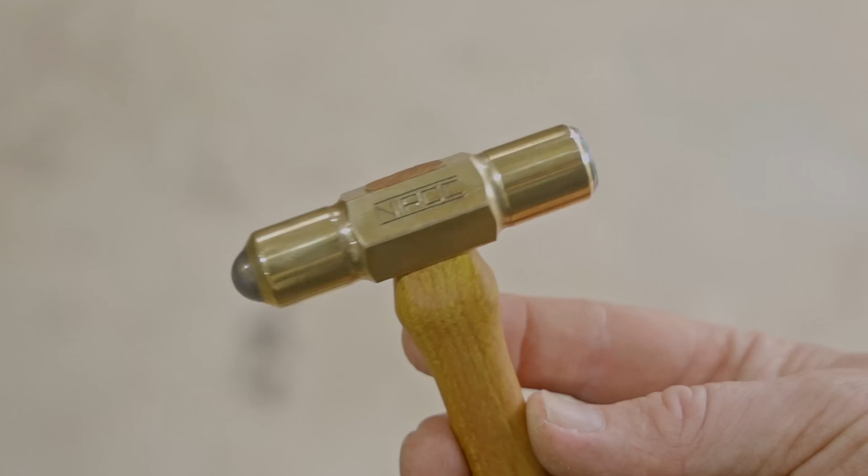A hammer or mallet is a fundamental tool for a maker, and most of us probably have a fair few of them. I don't have a huge collection, but here's a few of them, and they're all used for different tasks.

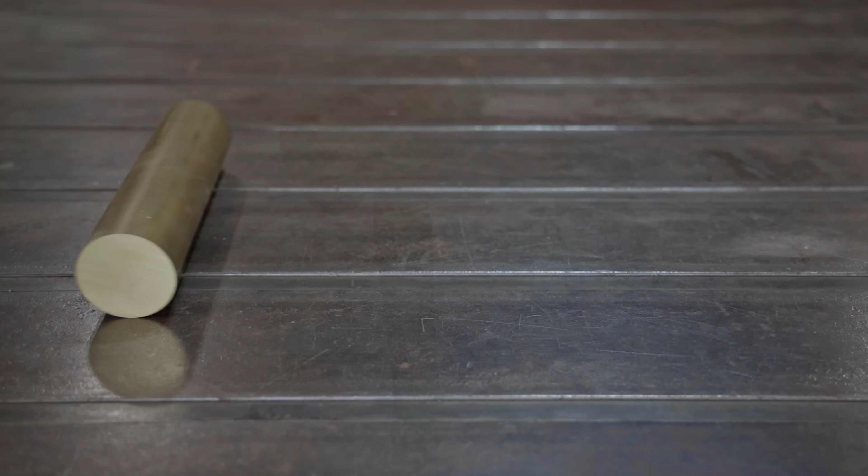One hammer I don't have is a brass hammer, so in this video I'll make one that I designed in Shapr3D. I've got a piece of brass round bar, so I'll cut a piece off that and I'll get straight into it. I'll face both ends first and get it to the correct length.

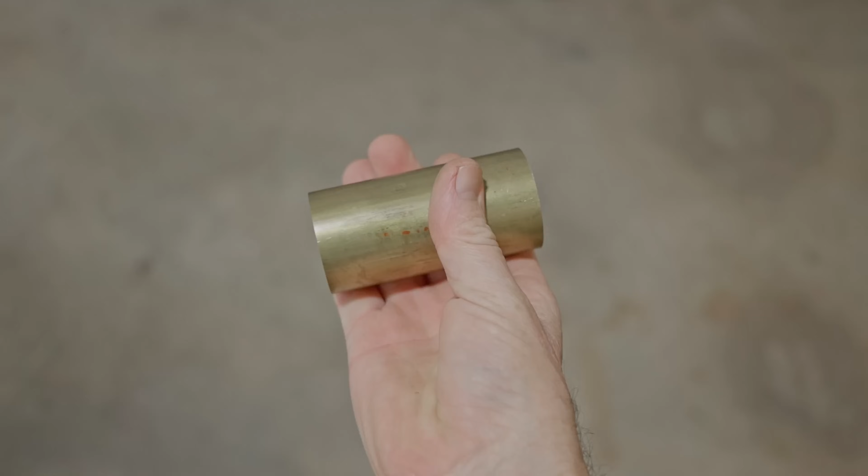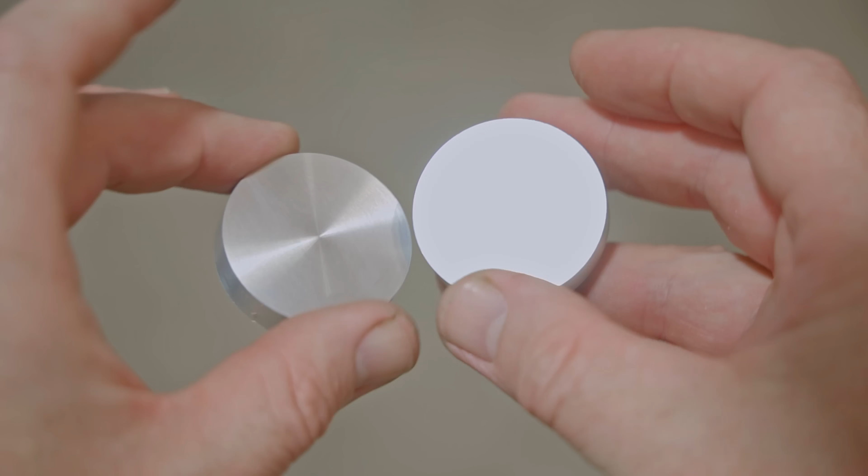I'll be turning the hammerhead between centres, and because I'll need to drill centres to mount it, I'll cut a couple of sacrificial discs that I'll glue onto the faces. I've sanded off the nubbins left from parting them off, but the opposite sides have been turned down flat before they were parted off, and they'll be the sides that will get glued.

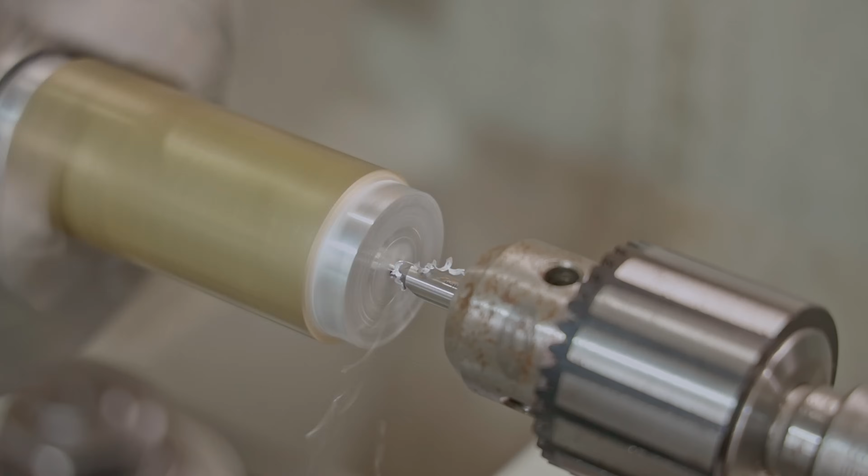I'm pretty confident these should hold on the lathe. The main thing I need to look out for is not getting too much heat into it while turning it. Next, I'll drill the centres ready for mounting it. The disc is slightly off centre, which doesn't matter, but the bar needs to run fairly true, as the brass I have is only slightly larger than the final dimensions of the hammer.

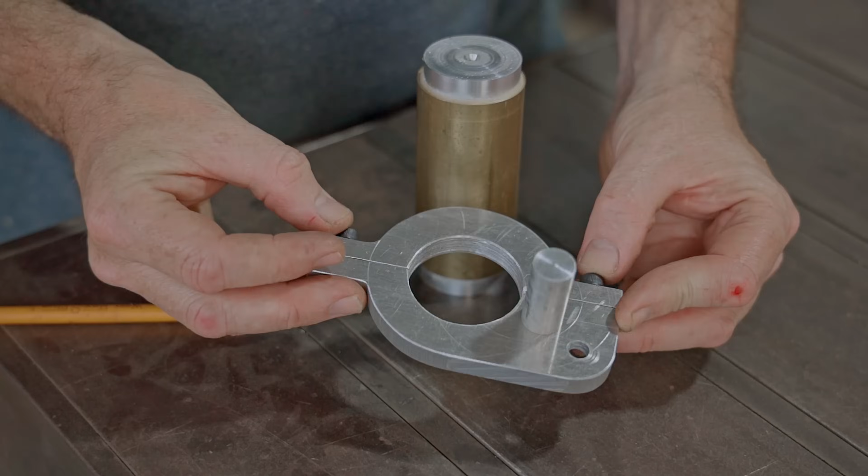To drive the workpiece when mounted between centres, I made this crude drive dog, and the spigot of that will contact one of the jaws of the chuck and rotate the workpiece. The drive dog is only made from aluminium, but I have already used it on this test hammerhead I made a couple of months ago, and it worked well.

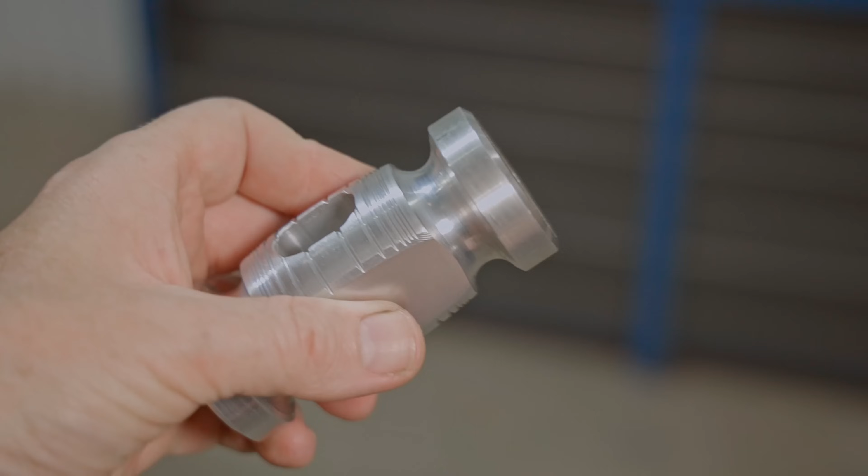I've put a dead centre in the chuck, and I turned that down with a light cut to ensure that it's running true, and now I'm mounting the hammerhead using the live centre in the tailstock. The first thing I'll turn is the fullers either end of the hammer, and I'll try out this carbide cutter and see how that goes.

I'll set the face of the brass as my 0 point, and I'll reference everything from that, and I'm using a cutter with a point in the centre of the holder which matches the centre of the round cutter that I'll be using next. That's not cutting as well as it did when I made the aluminium test hammer. The lathe is running too fast, but I did try it out at a few different speeds and it was no better. Next I'll try out this high speed steel cutter and see if that's any better.

It is working much better, but it's a bit grabby, so I've decided to cut a groove in the centre of the fuller using a parting tool and then see if that helps. One way or another I will get there, even if I have to file it. The groove will also give me a depth guide of where to cut the fuller to.

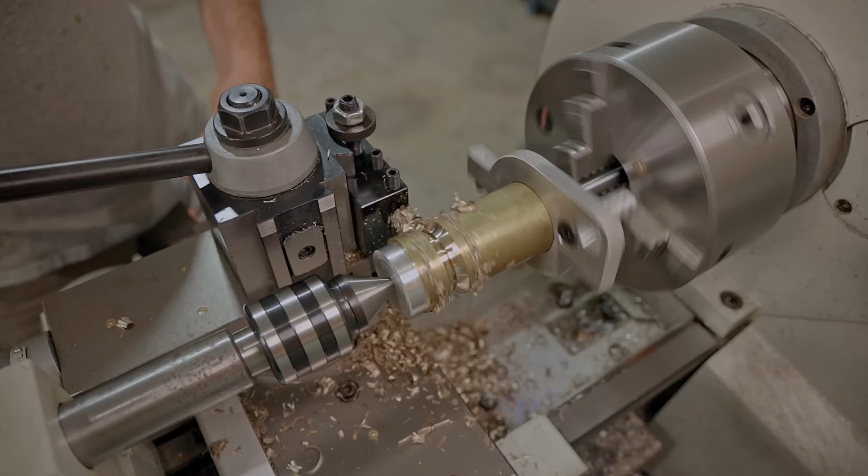That's working much better, and I'm trying to feed the cross slide as slow and smooth as I can, but it does still grab a little now and again. As I'm getting towards the end, the tool is cutting a bigger area and it's grabbing a bit more, so I'll stop at that and I'll finish it from there with a bit of sanding later on.

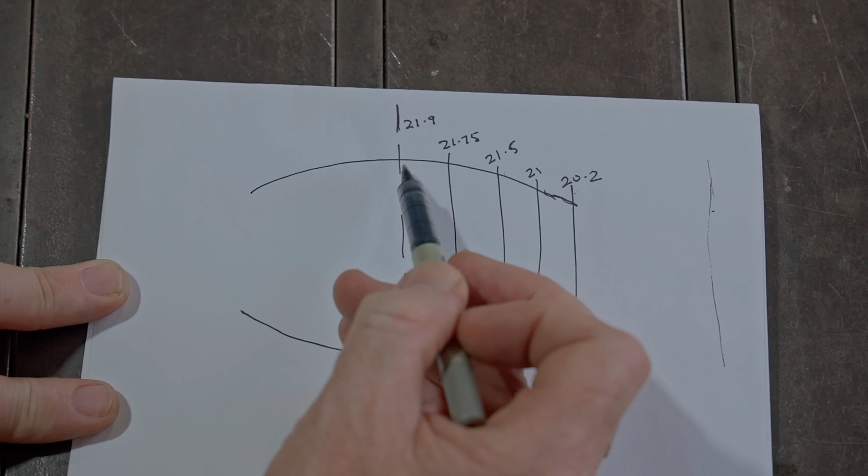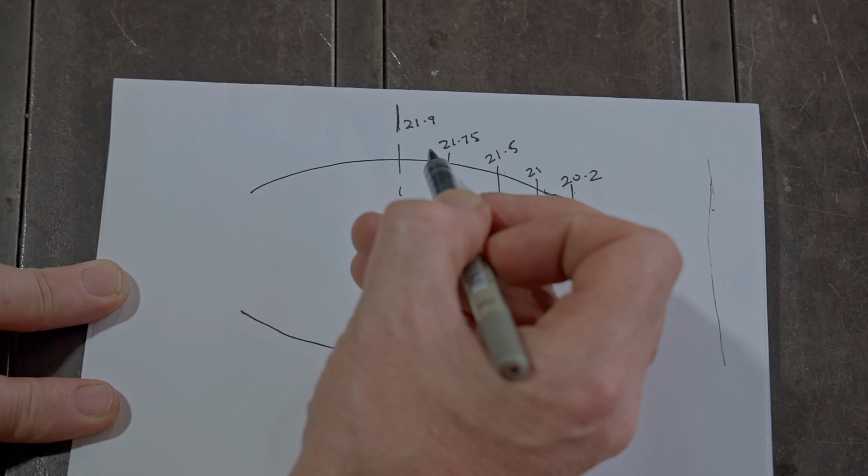I reckon the fullers look great, so next I'll turn the middle section into a barrel shape. Using the 3D model on the computer, I've worked out at the centre line, which is 45mm from one of the faces of the hammer, the radius will be 21.9, and 40mm across it will be 21.75, and so on. There'll be a series of steps, and then I'll just use a file to file those smooth. I'll take light passes until I get a full cut all the way across, and then I can take a measurement from it.

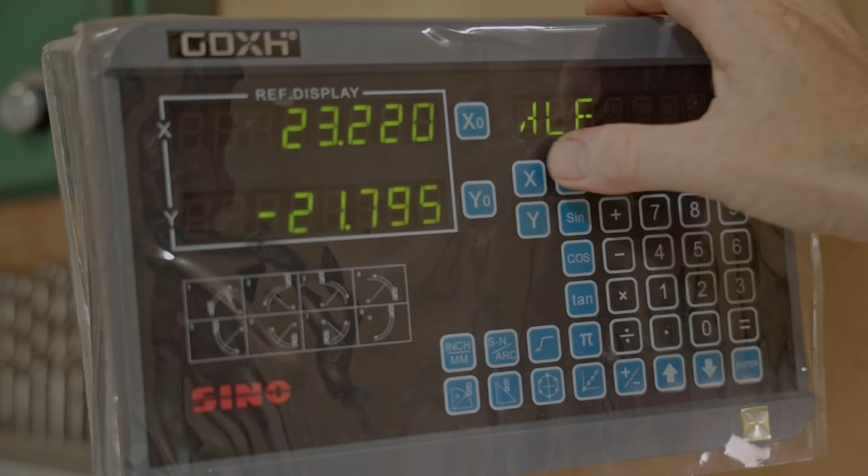Now I can measure the diameter with my calipers, and I can put that into my DRO and then halve the x-axis for the radius, and from there I can input the radius of each step. First I'll take the whole section down to the radius of the centre position, then the next cut will make the first step after I've moved the cutter in using the reading on the DRO. I'm using the power feed but stopping a little short and finishing the cut with the hand wheels.

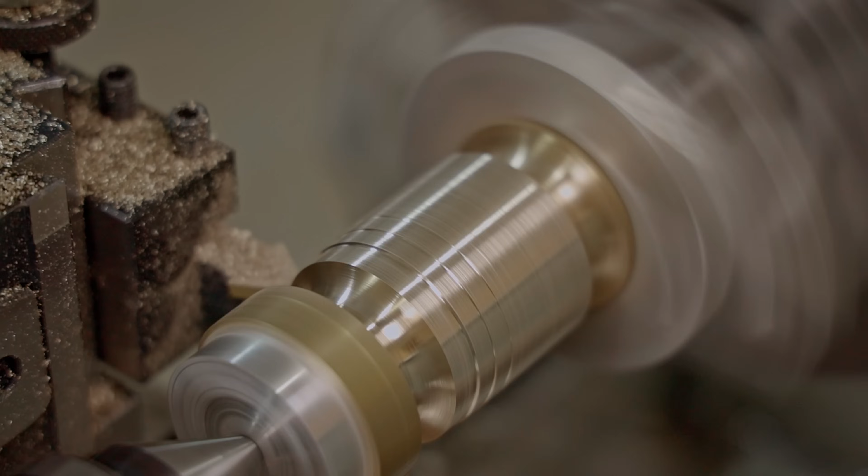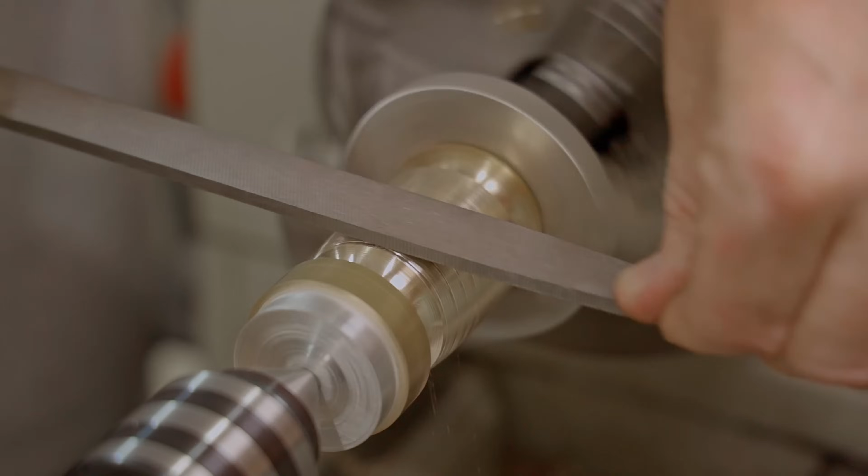That was easy enough. The hardest part was figuring out the radius at different positions, but actually that was pretty easy to do too using the 3D model. I'll file this half now while it's easy to access, and I did think about cutting the other end first and then filing the whole thing, but I'd be getting pretty close to the drive dog and this way will be safer.

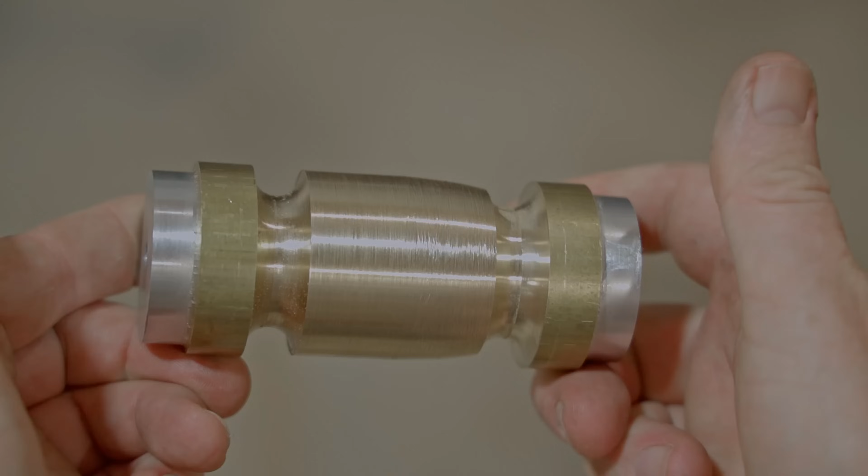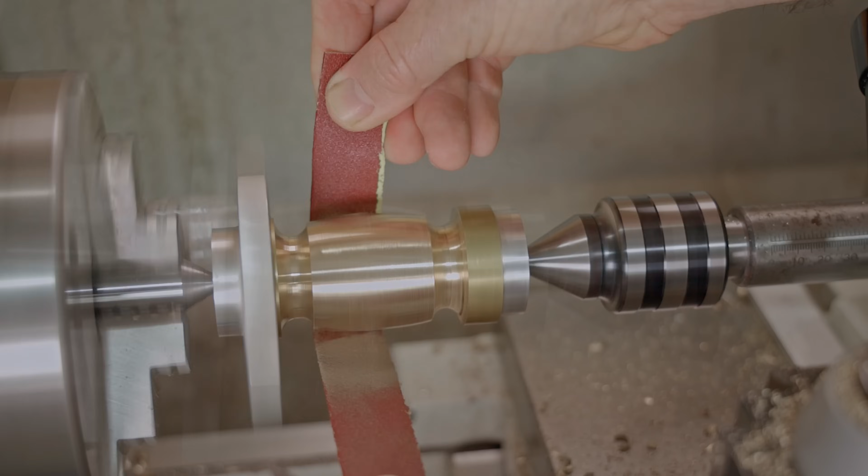It's a fairly subtle curve and it should look even better when the other end is done, which I'll do next. It's beginning to look like a hammer. Next I'll turn down the ends and then cut some chamfers on these edges. I'm using a 60-degree cutter either side of the fuller and then a 45-degree cutter on the outside edge.

And as with all the other steps, I've put the drive dog on the other end and repeated it. I'm just judging the chamfers by eye and matching them to the other end.

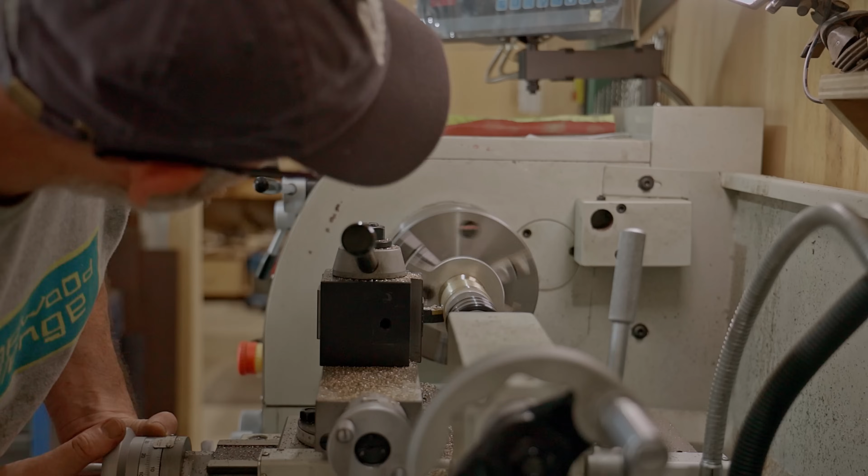Next I'm adding some rings to the barrel section, and these are just for looks, but hopefully they should look pretty cool. I come across to the correct position, then I'm touching the tool onto the hammer. I then zero the x-axis and then I can cut a ring to the depth that I want, reading the DRO.

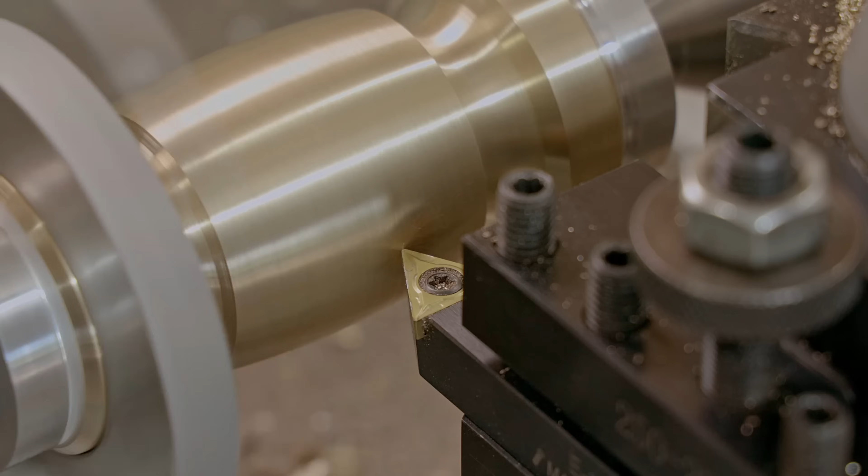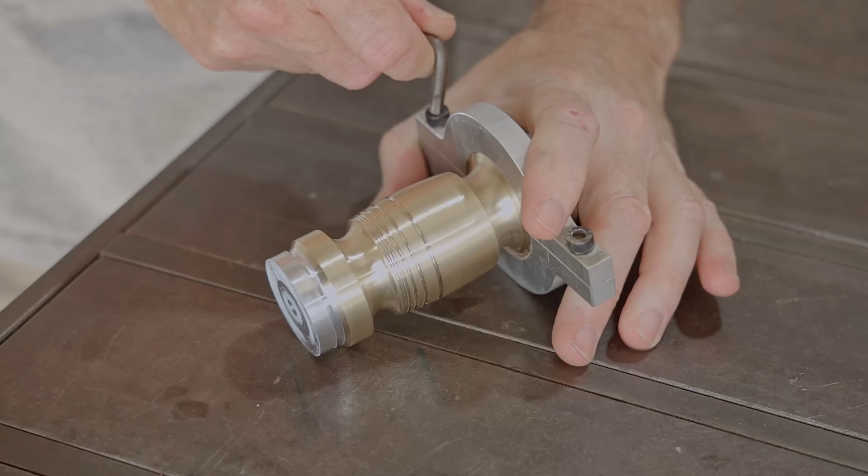Starting with one of the middle rings, I cut that to a depth of 0.9mm, and then each ring afterwards gets slightly more shallow, which should leave a subtle but nice effect. I then go through the same procedure for the next ring and then so on. I'm super happy with how they look.

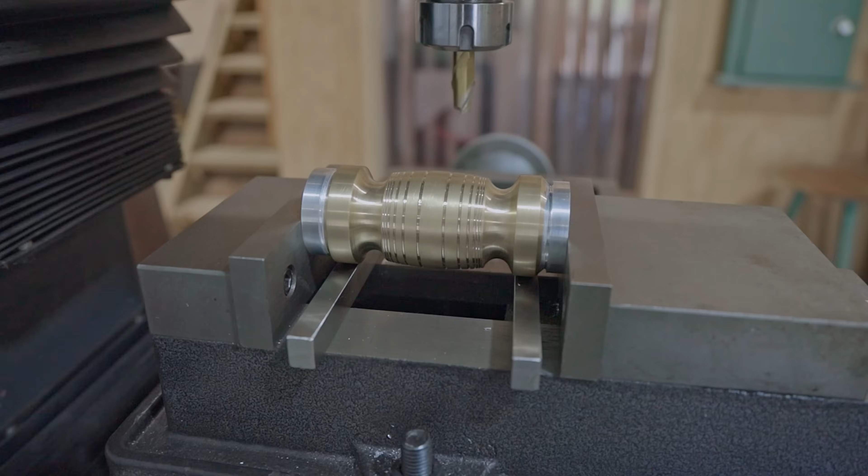Next I'll machine the cheeks of the hammer on the milling machine. I've got each end sitting on parallels. I'll mill one side with the height gauge set and then flip it 180 degrees and mill the other end to the exact same depth.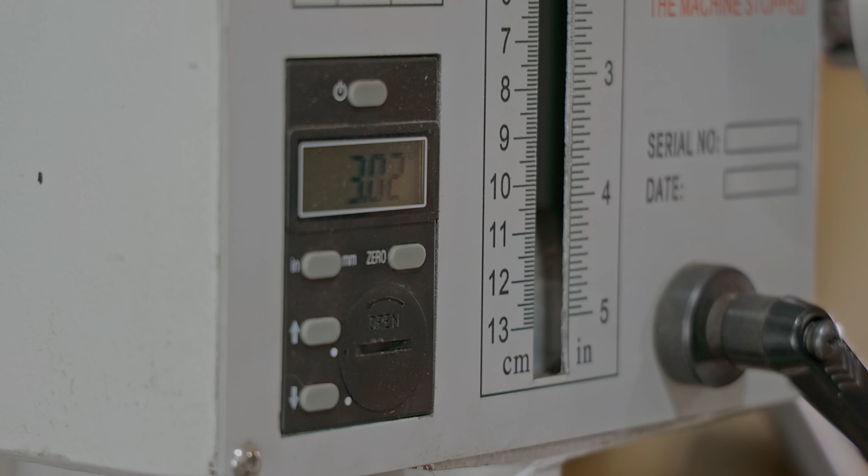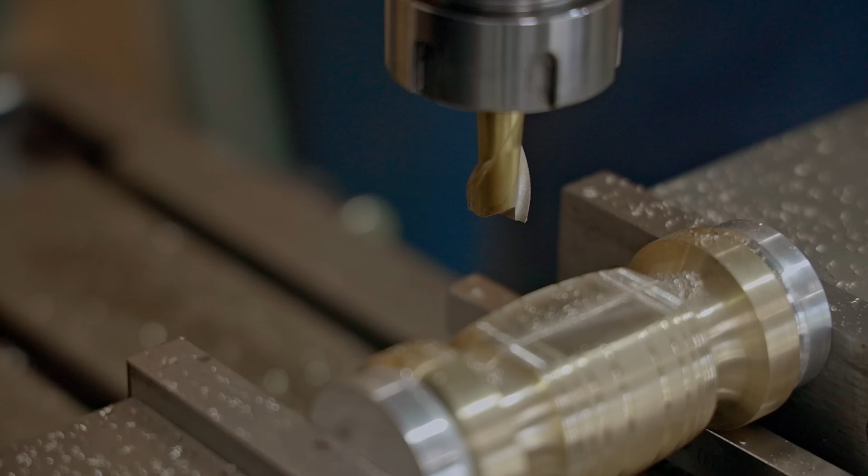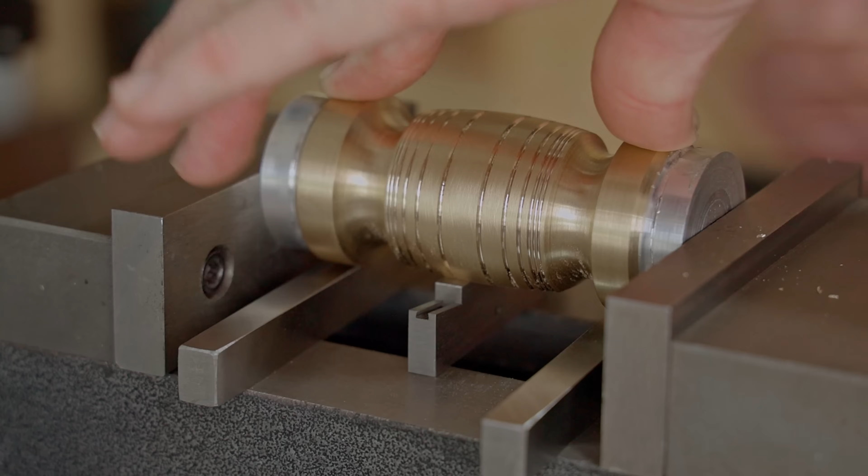To ensure the two opposite cheeks are parallel to each other, I'll use an adjustable parallel underneath the first side, and that will set it level, ready to cut the other side. That went very well. Now I'll drill the eye ready for a handle.

First I'll use an edge finder to locate the centre, and from there I'll remove some material by drilling a couple of holes from each side, and then I'll mill out the eye afterwards.

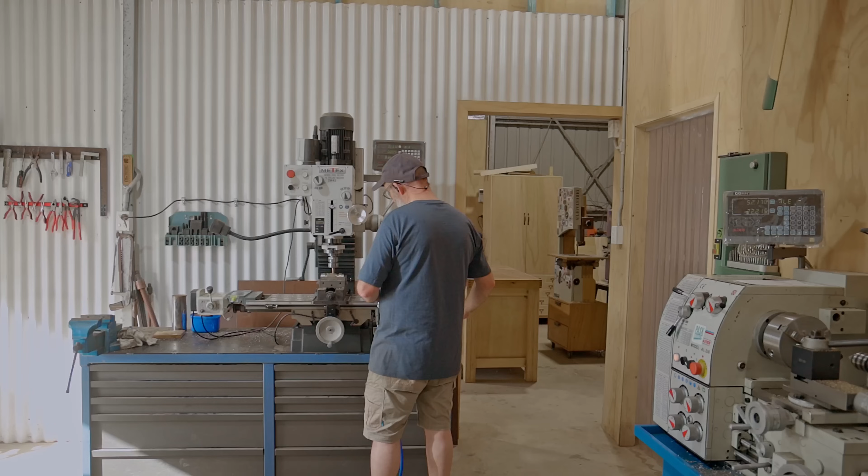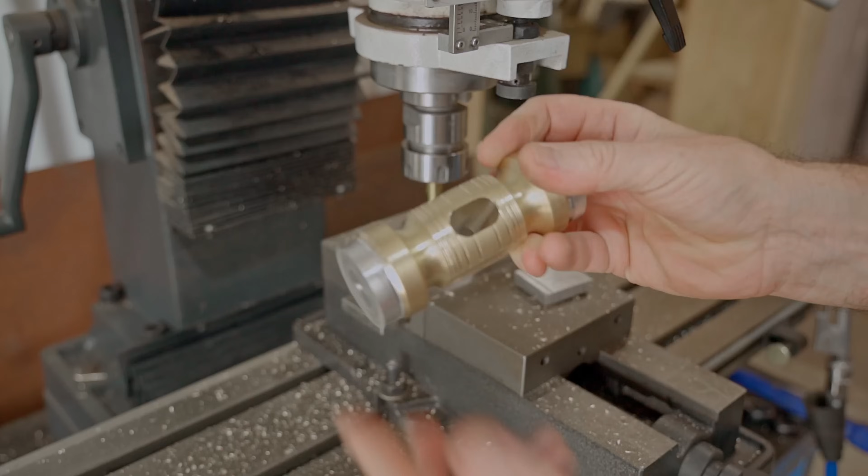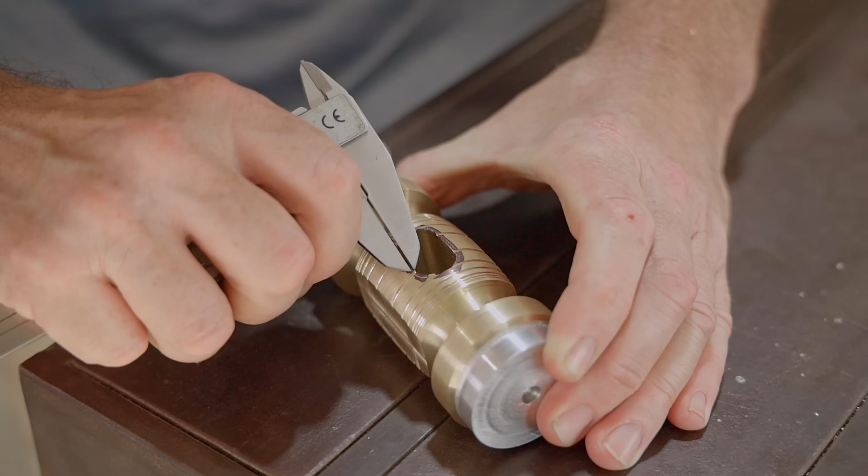Next, I need to taper the eye into an hourglass shape ready for the handle. I thought about machining it, but by the time I set something up, I could already have it done with a file. It took about a quarter of an hour, and I reckon that should work. To finish the eye, I'll neaten the edge by filing in a chamfer.

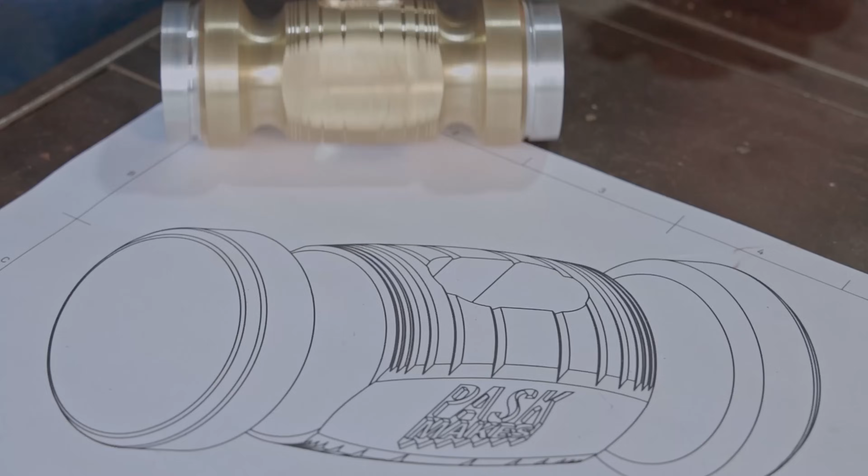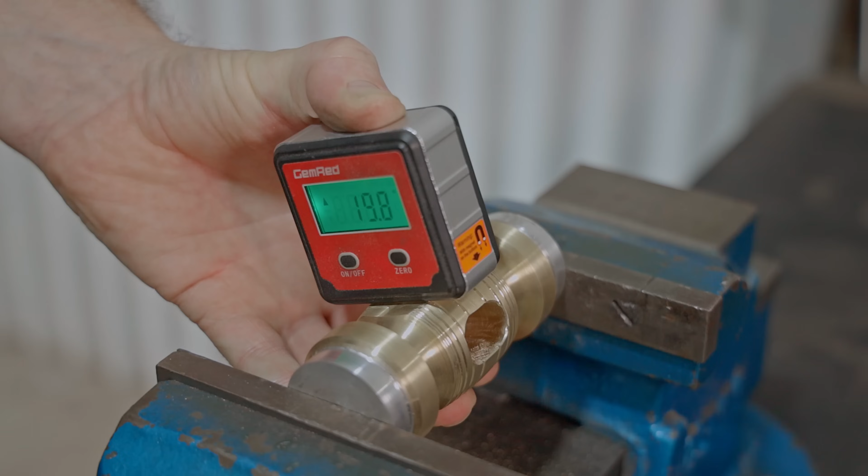There's one more feature to go, which is another chamfer where the rings meet the cheeks. This really wouldn't be easy to machine, so again I'll do it by hand with a file. I'll set the angle of the cheek to 20 degrees and then try and keep the file level by using the vice jaws as a guide. Then it's pretty easy to keep the chamfer a consistent width just by eyeballing it.

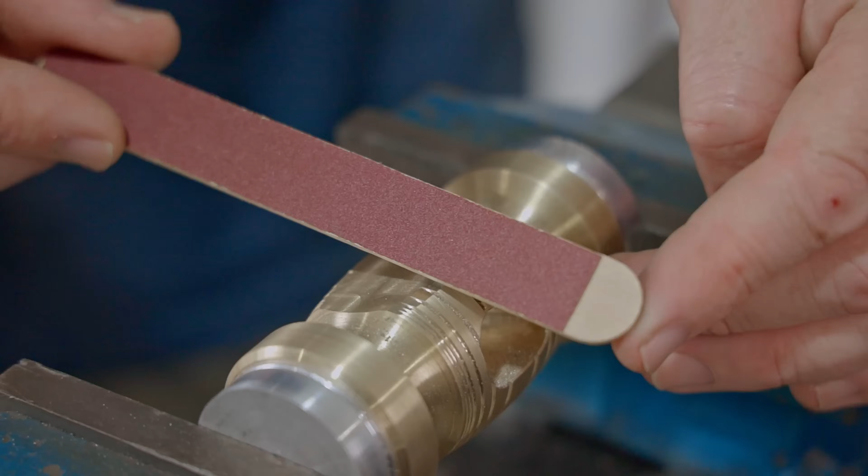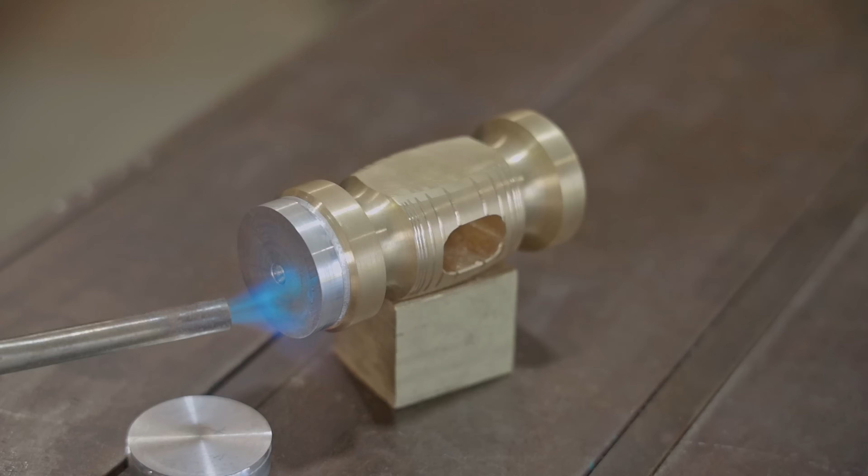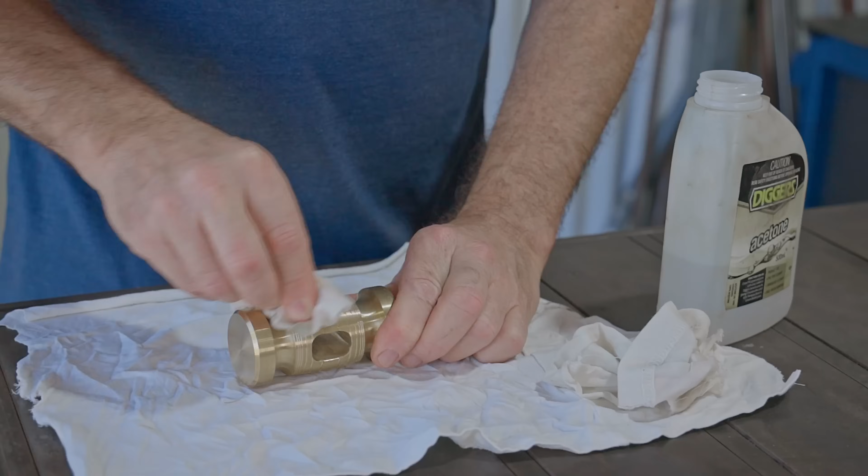That was easy enough to do, and I reckon the chamfers finish it off nicely. Next I'll sand the faces ready for etching on my logo. I'll clean off the glue with acetone, and while I'm at it, I'll clean down the whole hammerhead. Now it's ready for etching, and for the resist I'll use vinyl.

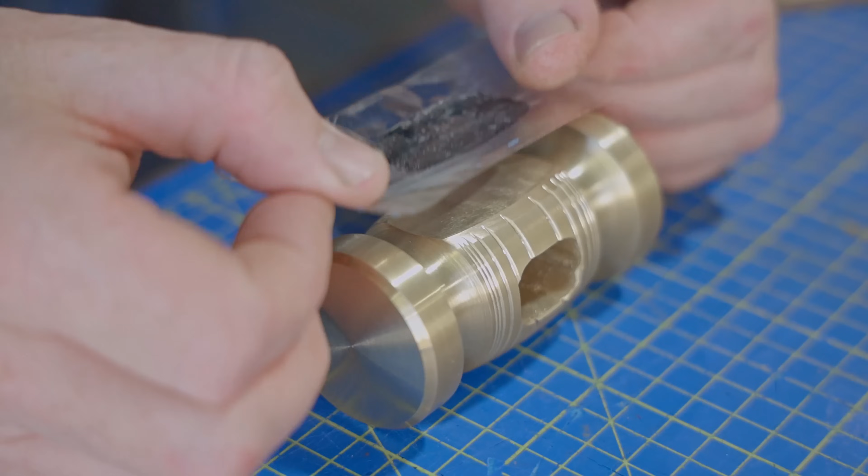I'll transfer the whole vinyl and then weed off the areas that I need to directly off the hammer. I haven't tried this before, but someone told me to try this method. Sorry I forgot who you were, but thank you anyway. In the past, when I've weeded it first before transferring it, some of the very small pieces of the design come away, so I thought this method was worth a try.

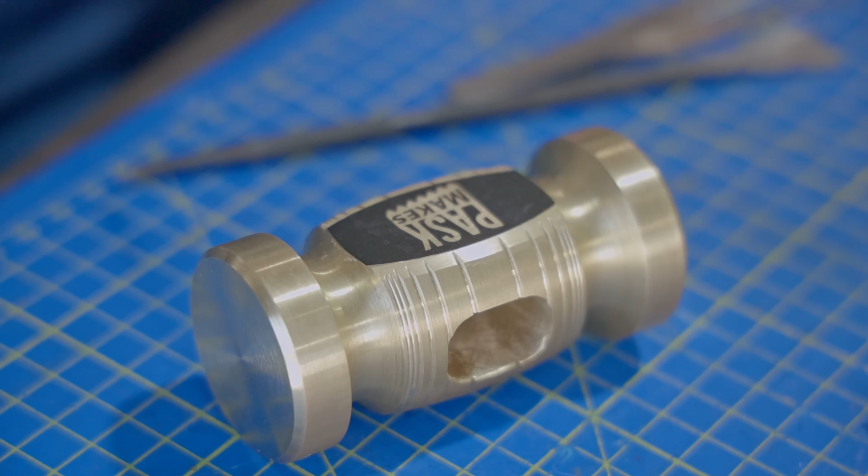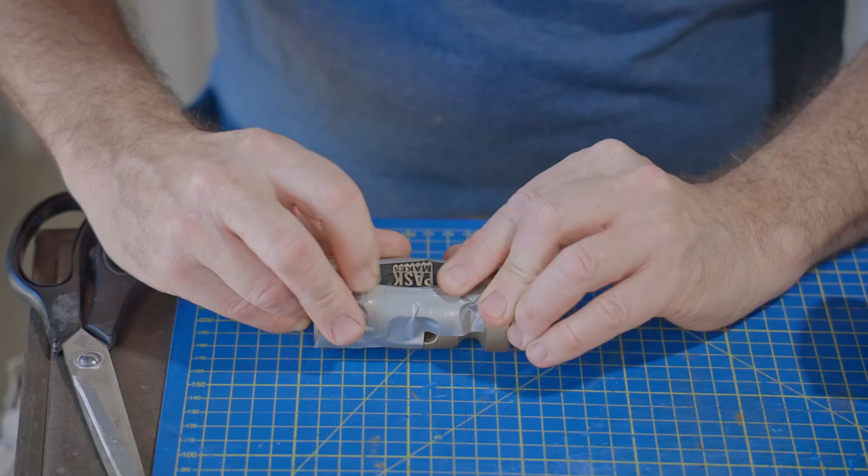The etching surface is facing down, which is the ideal position. This is my preferred solution for etching, and I've had fantastic results from it. I mix it 5:1 with water and keep it at 70 degrees C.

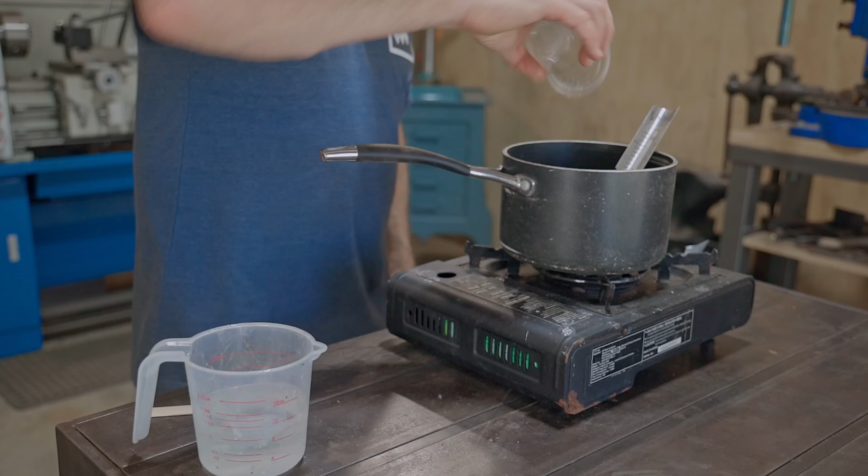Every so often I take it out of the etching solution and brush it to expose a clean surface ready for the etch to do its thing again. It's been 2 hours, so I'll take it out and rinse it in water to stop the etch, and I'll take a look at it.

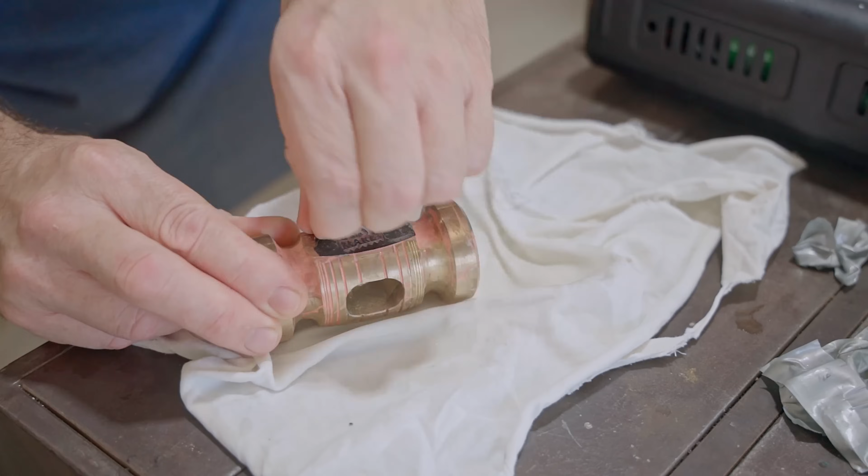I didn't tape it as well as I should have, and some of the etching solution has leaked. It's not that deep at all though, so it will be easy to clean up. I could have spray painted the rest of the hammer for the resist. I thought about it and I probably should have done that. I'll clean off the pink areas and get it looking back to normal again.

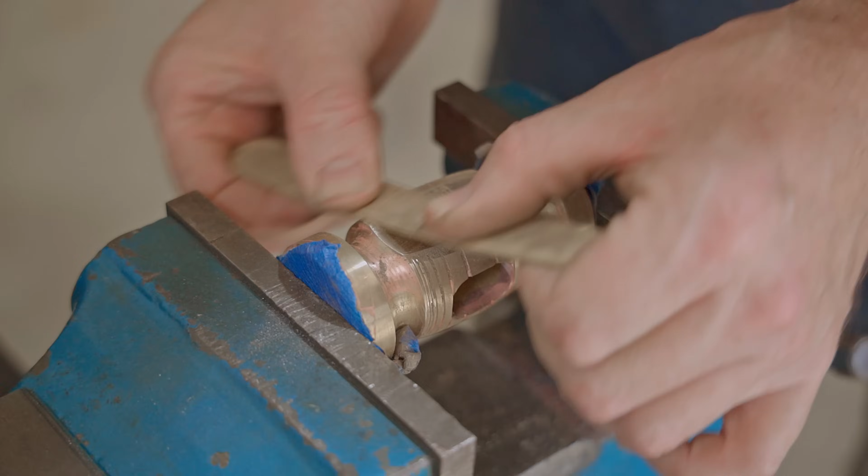I didn't check the etch often enough, and the last part of the process has aggressively etched in the logo, leaving some deep pitting. This has never happened before. It could have been worse, but I'm still disappointed. And there's the pitting. I'll leave it for now and have a think about what I can do.

Anyway, onto the handle. I'll use spotted gum, but if you get hold of one of my limited run hammers, the handles made by Liam will be hickory. Hickory isn't the easiest thing to find in Australia, and spotted gum is the handle material of choice.

I'll round over the end, which will eventually become a dome. It's something I really like and I use on most of my handles, and this will be a good starting point to finish it from. Next, I'll hot glue one of the waste pieces back on, attach the other template and cut it out again.

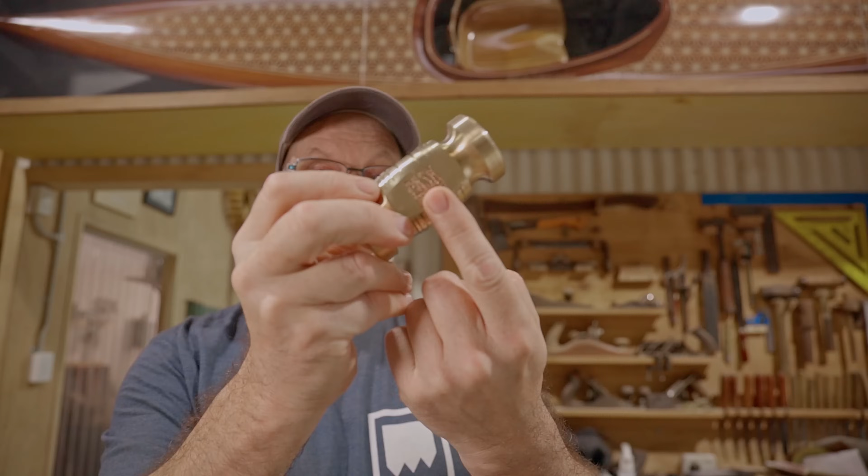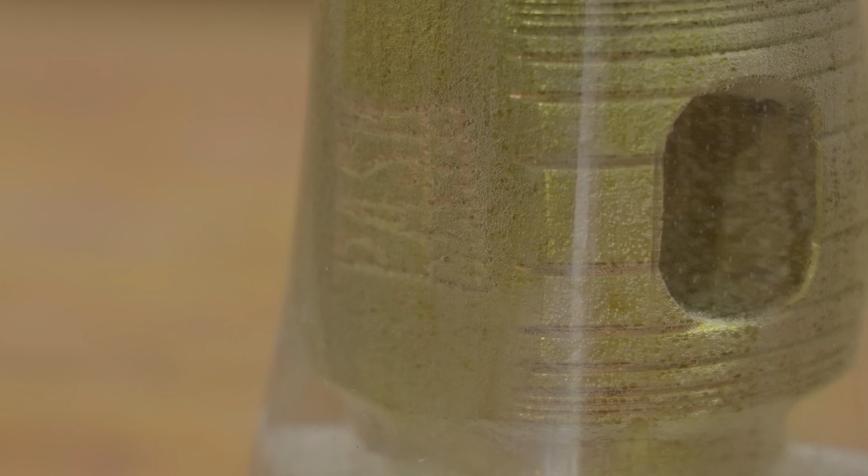Before I fit the handle, I'm going to try and remove the pink that's in the logo of the hammerhead, and that's the copper content of the brass showing through, and I'll remove that with hydrogen peroxide and vinegar. That works really quickly. It was only in there for a few minutes, and when I took it out I was a bit worried what I'd done to the whole thing.

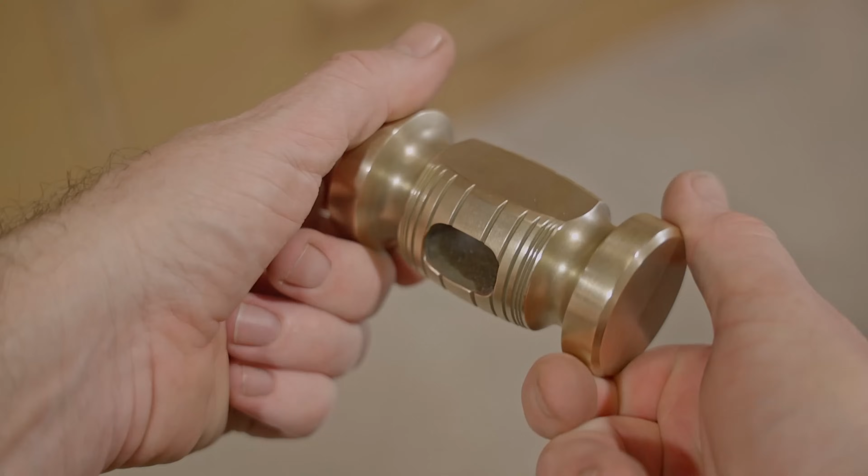I cleaned it back up with wire wool and I reckon it looks great again. It looks like it has a very slight patina, which I like, and the logo looks much better. It's not perfect, but I think I can live with it now. I could paint it, but that wasn't something I ever really wanted to do.

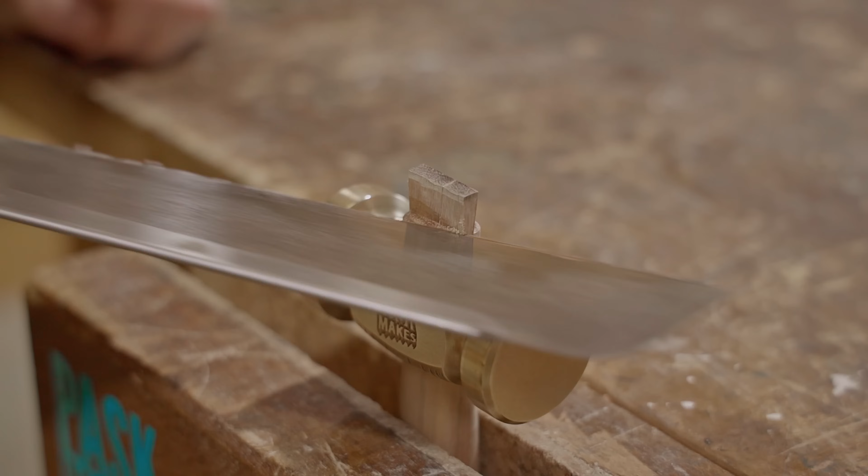Next, I'll fit the handle. I'll make a cut for the wedge, and that will be at around 2/3 to 3/4 of the height of the hammerhead. To finish the handle, I'll use boiled linseed oil.

I'll try it out with a bit of chisel work, and I'll cut a random pocket out of this scrap piece just to see how it feels to use. It's fantastic with a really nice weight to it, giving lots of control, and it's a pretty cool looking hammer too, if I'm allowed to say that. I'm super happy with it, and I reckon it turned out awesome. I'll use one of the hammers for chisel work and general woodworking, and the other will be for use on the milling machine.